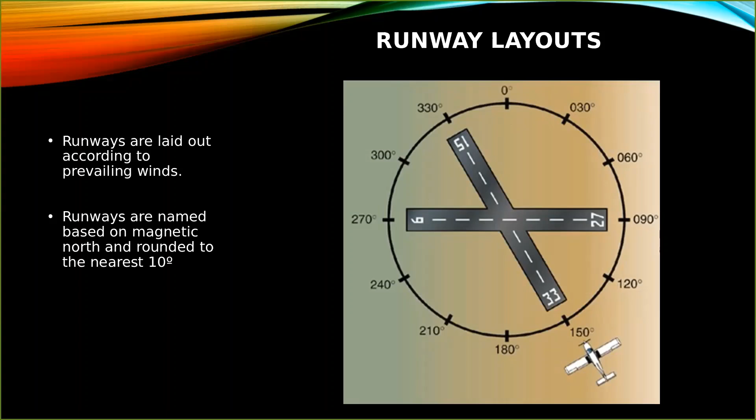Cool. So then there's different types of runways. Essentially, the more complex the operations at an airport, the more complex the runway will be. So a visual runway, pretty much what we have here, has numbers and a center line, because they don't have crazy operations. They don't have airliners flying in on their instruments. They know that when people fly, it's mostly going to be visually flying. So it's not that crazy of markings.

Then as the demand increases a little bit, so non-precision instrument, they'll add some more markings. So this beginning part is called a threshold. It just signals in the air that this is where the beginning of the runway is and you can land. And then it has these two markings here, which are technically called your aiming points, also referred to commonly as 1,000-footers, because they are 1,000 feet from where the runway begins. And that's where you typically want to try to touch wheels down, within this spot.

And then you have your most precise runways. This is what you can find at huge airports, DIA, because they have a lot of planes flying in based off of their instruments, which then lead them to all these markings. So really they're adding these right here. These are touchdown zone markings, just letting planes know where they want to try to touch down. These touchdown zone markings are spaced every 500 feet.

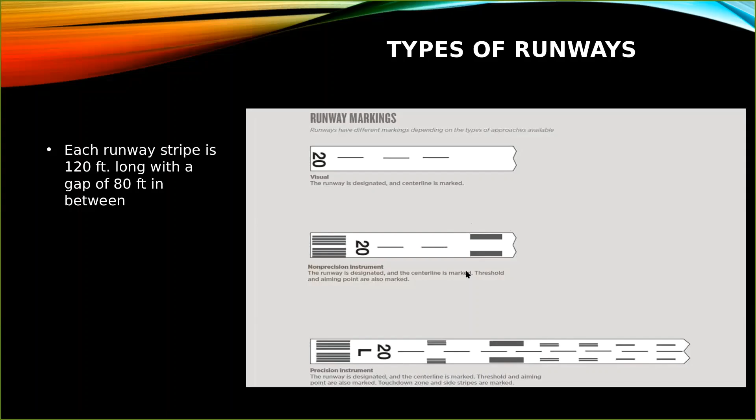But yeah, captain's bars, they may call them. So we then have relocated runway thresholds. Like I said, a threshold indicates the beginning of a runway. It lets you know where the runway begins and where you can land. At some airports, there's now buildings popping up on the approach to the runway. It's now unsafe to approach the runway on their current glide slopes, so they may have to relocate the beginning of the runway. It's usually indicated by these yellow chevron marks.

And a good rule of thumb is when you see yellow lines, it's taxiway, white lines, runway. So you can use the spot leading up to it for taxiing, but you cannot take off or land, obviously, in the spot designated for taxiing. It does shorten the runway length available, but the chart supplement we referred to before will give you how much runway is available.

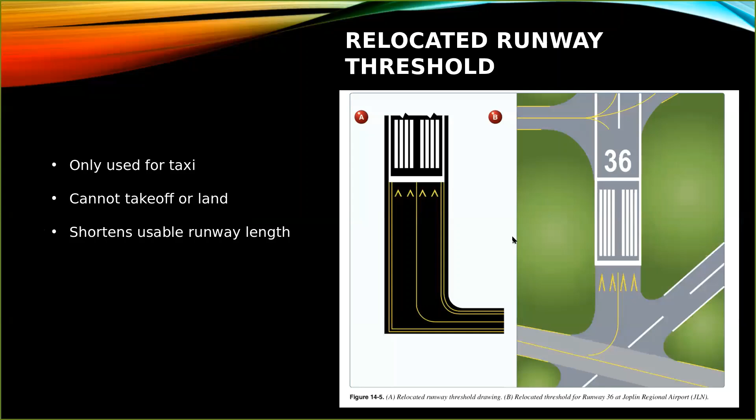And then these are blast pads, indicated by, again, chevrons, but they won't allow taxiing on this. It's just designated areas to protect property, cars, whatever, from jet blast so that the jet blast doesn't just destroy whatever it's going on to. Can't use it really for anything except for emergencies if you absolutely have to. Otherwise, can't be on it.

Sometimes runways will be closed, and when they do that, they'll put a giant X on the runway. If it's permanent, they'll paint it on the runway every 1,000 feet. If it's not permanent, then they usually have vertical signs with a big X letting you know that the runway is closed. Now, this also can be applied to taxiways. They can close taxiways as well. But usually that'll be announced over a NOTAM or air traffic control telling you not to taxi on it. But you can sometimes find these on taxiways.

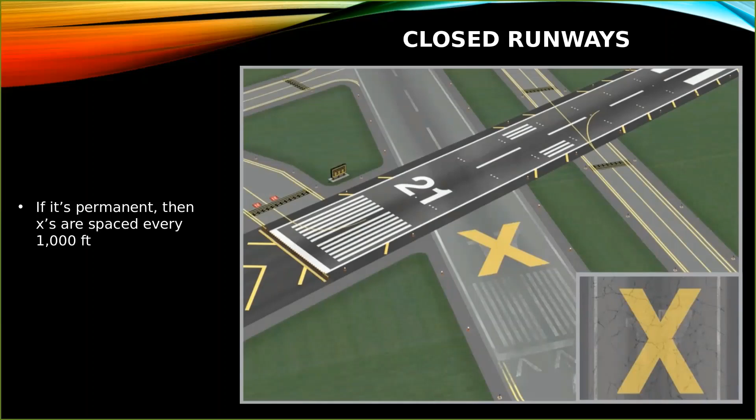So one of the most important signs and markings that you will have in aviation is a hold short marking. That's what this is. It's the double solid line, double broken line. That means it's the area where you have to stop before approaching a runway. That marking, you can never cross that without getting a clearance from air traffic control to cross that hold short marking. Associated with it is this red 2-1.

So again, this sign indicates you're approaching runway 21. And like I said, the red signs are kind of like a stop sign. You need to stop. It's letting you know also visually, stop here. The way that I like to think about hold short signs is that the solid double line will always be on the side of the taxiway approaching a runway. So a solid line means I cannot cross that.

I have to stop. Now you may think, well, what about an uncontrolled airport? You always have to stop. The only time you can cross that is once you visually verify no one is coming in to land on final. No one is currently on the runway. And because it's an uncontrolled airport, if we have winds where people can't decide on which runway, you might actually have a plane coming in to land on the opposite end of the runway. So you always confirm that those three are clear of aircraft before you cross that.

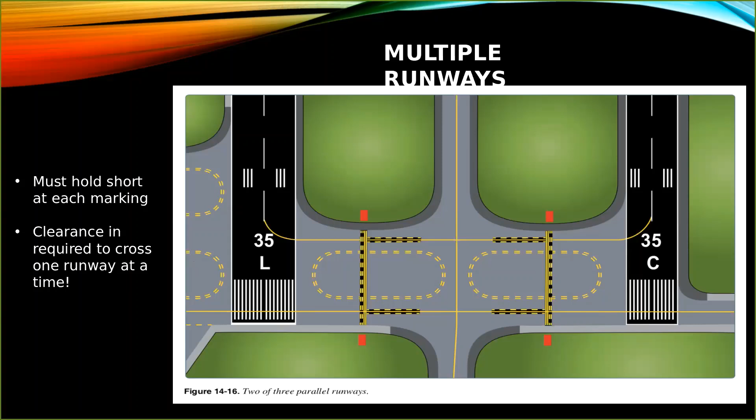And if you're ever unsure, always stop because you're not breaking any rule. All they'll say is you're good to go. You don't want it to be the opposite. If you cross that and now create a collision hazard for an aircraft, you're possibly looking at your license getting taken away. So these are the most important signs in an airport environment.

So now this is the runway coming up to a hold short sign. We addressed the solid side as like a barrier you can't cross, but the broken side you can freely cross because you are coming off the runway trying to get clear of the runway, so you can freely cross the hold short on the broken side. So that's how I kind of remember it.

The solid barrier means I must stop. I can't pass without clearance. The broken side is I can freely cross. You clear your plane all the way across it, and then you come to a complete stop, perform an after landing checklist, or if you're at a controlled tower, you have to call ground, get a taxi clearance. Does that make sense? Okay. Cool.

What this does is it creates a runway safety area. So aircraft taking off, aircraft coming in to land. Let's say there's crazy crosswinds where they can't maintain control. They get blown off the runway. What it's really doing is creating this area where they can safely do whatever they need to without running into us. Because if we just go right up to it and they get slightly blown off, they could be creating a collision hazard with us.

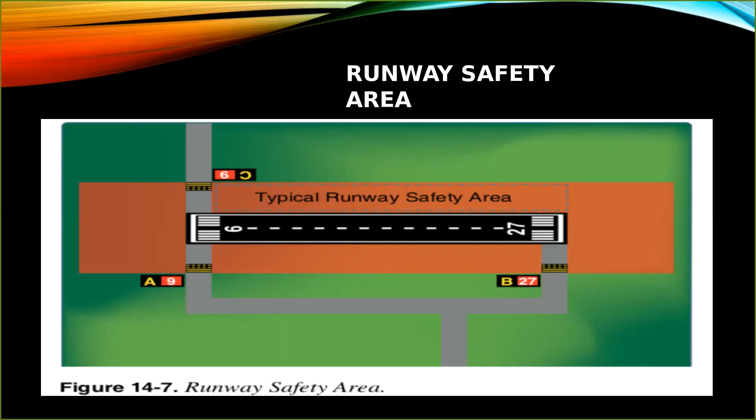What you'll also see is the ILS critical area hold sign. This is the ladder-looking one, so it looks like a ladder. You'd most likely, it'd be rare that you as a private pilot without an instrument rating would encounter these, because once ILS is in effect, that means the minimums are pretty much below VFR flying that a private pilot could do, and they're having planes coming in based off their instruments. However, they have this hold short so that planes stop here and don't interfere with signals that are guiding planes in both vertically and laterally.

So it's rare that you'd probably encounter this as a VFR pilot, but you never know. But if air traffic control tells you to hold short of the ILS critical hold area, you hold where this ladder sign is, with the ILS marking next to it. So a visual representation of what it's doing: this is a normal hold short area, and this is the ILS hold area. It's creating that protection so that the signal getting sent out to aircraft instruments is not getting blocked, because if our plane was here, our tail may interfere with a plane being guided down to the runway vertically. That's why they have those in effect.

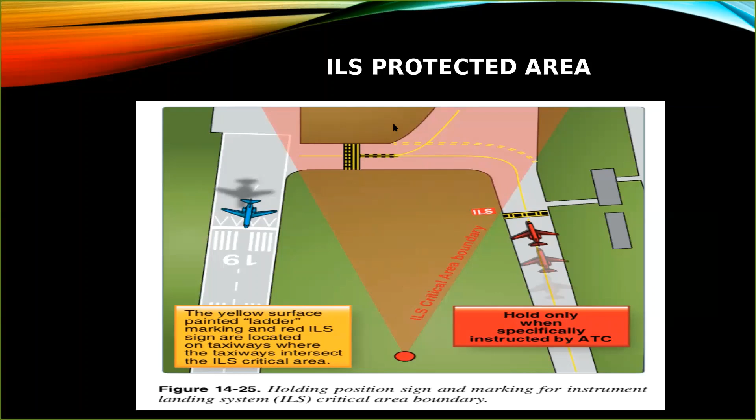Mental aid that I use to remember this is just like driving a car. When we drive a car, we drive on black asphalt, usually a two-lane road, with white or yellow stripes in the middle. Whatever helps you keep that in mind—black background with yellow lettering will always tell you where you are located.

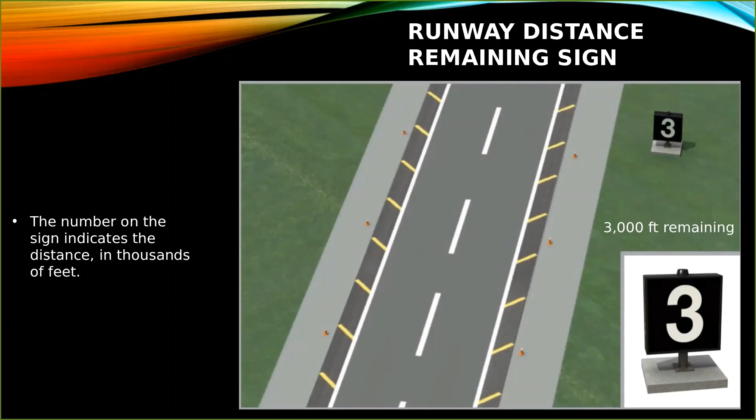Land and hold short operations—it's always referred to as LAHSO. So someone may give you a LAHSO clearance; that's what they're referring to. What it is, they're giving one aircraft clearance to land, and if they say land and hold short, they're saying land and hold short of a specific spot on the runway, usually that hold short marking that we saw.

You always have the option to deny one. So if they say, can you accept a land hold short on runway whatever, you'd say unable. It gives them a little bit more work, but if you're a more experienced pilot and familiar with an airport, and you know you can absolutely stop before then, sure, go ahead and do it. If you fly into an unfamiliar airport and don't have that many hours, I would deny it. Because what happens if this aircraft has an emergency on the runway and has to do a go around? You guys are now converging and potentially creating a very dangerous situation. That's why they don't allow student pilots to do it—they want private pilot license or above.

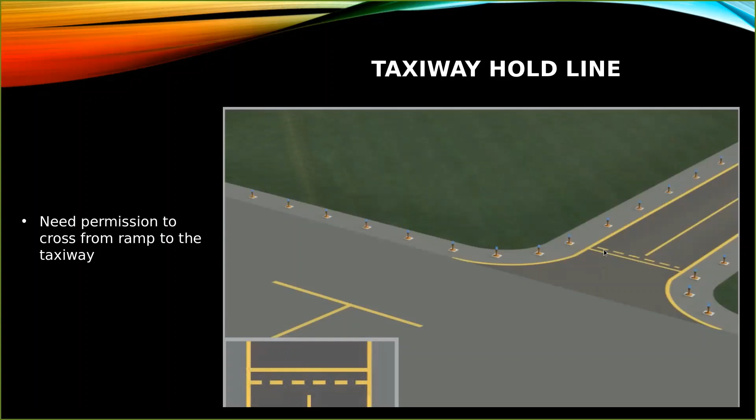Just like a runway hold short line, we have taxiway hold short lines. These are different because it's one solid bar, one broken bar. Same rules apply: you have to stop and get clearance from ground air traffic control before going onto the taxiway, or if you're at an uncontrolled airport, confirm that you're not going to be a taxi hazard to any other aircraft. If you're on the side coming from the ramp, it'll usually be from the ramp leading onto the taxiway. However, if you're getting off the taxiway, you have that broken line you can freely cross.

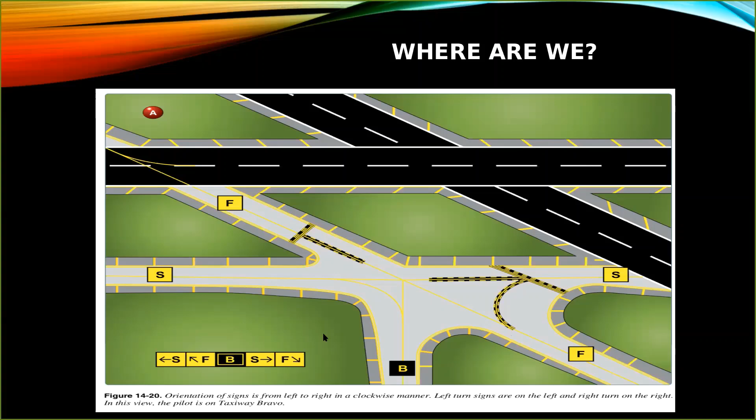This is an airport diagram. Airport diagrams give you a layout of the airport, the taxiways, and the runways. On it they list what are called airport hotspots. Airport hotspots will always have these circles marked with HS, whatever number. These are a location on the airport movement area which has a history or potential risk of collision or runway incursion, or where heightened attention by pilots is necessary. Most likely a collision has happened here, or the designers of the airport have specifically laid out that this is a spot that's crazy with traffic.

This diagram on the right is Centennial Airport in Denver, where I trained. It's hard to see, but this spot here—this taxiway leads to it, this taxiway leads to it, this ramp leads to it, this taxiway, this runway taxiway pull-off, this runway taxiway pull-off—there's a lot of potential for aircraft to collide right there. So that's just letting you know the spots on the airport. Have your eyes peeled, take it slower than you normally would, so you're not going to run into other aircraft.

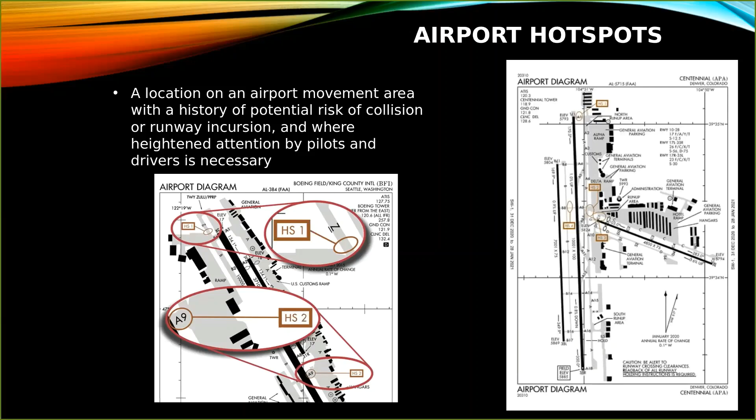Runway incursion avoidance is kind of putting it all together. The FAA is honing down on this. To quote the saying: any occurrence in the airport runway environment involving an aircraft, vehicle, person, or object on the ground that creates a collision hazard or results in a loss of required separation with an aircraft taking off, intending to take off, landing, or intending to land. It seems rare, but you have 3 of these that happen each day at controlled, towered airports with someone directing. Even then, 3 a day doesn't seem like much, but it equates to 1,100 accidents per year. The FAA is saying this is way too much.

So what can we do to make sure we don't create a collision or an incursion in the runway environment? Absolutely, knowing those hold short lines, and pulling up and briefing those hotspots on the airport. When you get a taxi clearance, they're going to say taxi via Bravo, Charlie, Delta. Go over that before you even start moving the aircraft and say, yep, where Bravo meets Charlie, that's a hotspot.

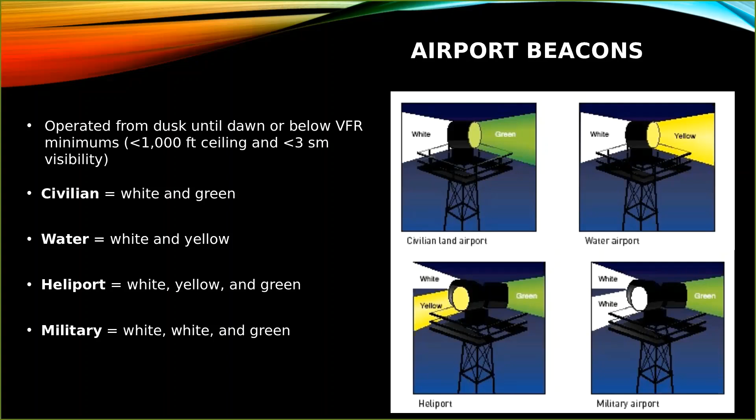Taxi edge lights will always be blue. If an airport doesn't have physical lights installed, some airports have blue reflectors lining the taxiways. Your more advanced airports will have taxi centerline lights, which are green. We don't have them here at Meadow Lake. We do have the blue edge lights, but Colorado Springs, I believe, has the green taxi lights. If you ever fly over there at night, you can kind of see that. It's pretty cool.

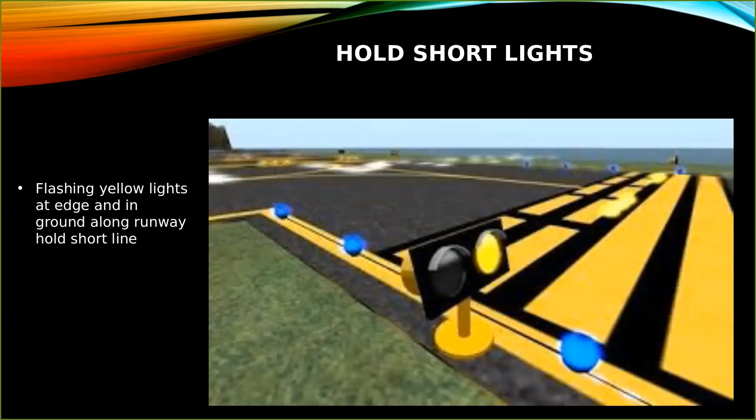From the taxiway, that leads us to hold short. Hold short lights, if equipped, have flashing yellow lights on the side of the hold short marking, along with some lights within the marking on the ground. We don't have this here at Meadow Lake. If you pay attention at DIA, next time you're holding short of a runway at night, you'll see these flashing. That's a big way to get your attention to stop, don't cross this line.

Now runway lights. Runway edge lights will always be white, along with runway center lights - they're white, hard to miss. When you're approaching a runway, the beginning of the runway is green. And then the opposite end, the far end, will be red. They do have dividers, so one side is green, and the side approaching or facing the runway coming the other way is red. So when you're approaching the runway, you'll see green, but as you land on the far side of the runway, you'll see the red lights identifying the end of the runway.

The beginning of the runway is sometimes also equipped with runway end identifier lights that just flash white. It's another way to get your attention to the beginning of the runway. At Meadow Lake, we have the green lights, but we don't have the flashing white lights on the side of the runway.

So they stay the same, except one side will be red if you look at it 180 degrees - correct, depending on the angle. If you're on one side, you'll see red; flip to the other side, you'll see green. But good question.

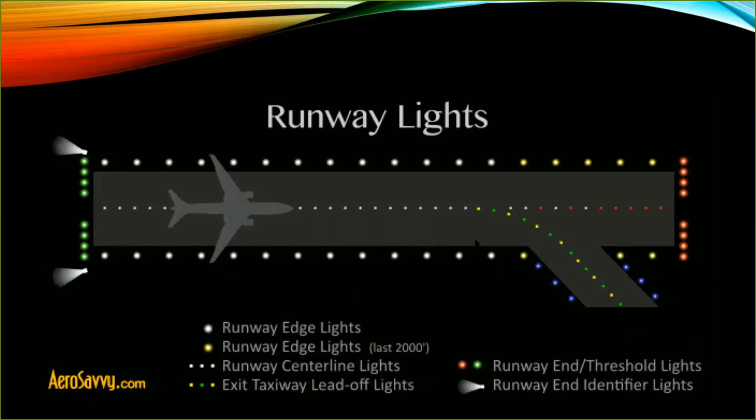Pilot controlled lighting: some uncontrolled airports have the option for pilots to control the lighting at night. This is an effort to preserve energy, but also allows pilots to use the lights when they need them. What you do is plug in the CTAF, Common Traffic Advisory Frequency - this is what you'd talk to other aircraft on. Once you're plugged into that, it's called keying the mic. Keying the mic is literally just pressing the button so you can talk.

To activate the lights, you key the mic: press it 7 times within 5 seconds for high intensity lights, 5 times within 5 seconds for medium intensity lights, and 3 times within 5 seconds for low intensity lights.

They operate on a 15-minute timer, so be aware of that. At night, I had a video of this but it didn't transfer. I told my student this while we were doing touch and goes at night, staying in the pattern. So I always say, within 2 touch and goes, take off, land, click it again to make sure the timer doesn't go off.

Well, he didn't do that. So I got my phone out because I was anticipating it. And as he was on short final, the lights disappeared. He freaked out. So know that it operates on a 15-minute timer.

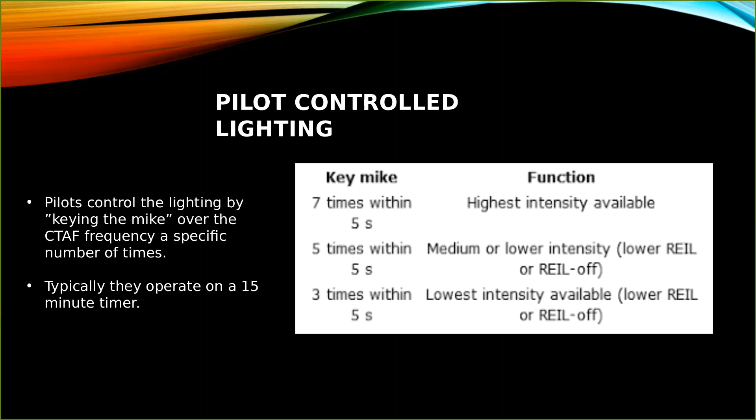We have approach light systems. This is primarily used to provide a transition from instrument flight to visual flight. So again, this just helps you identify the runway, and it's mainly for instrument flying, but you guys will probably see this throughout your flying.

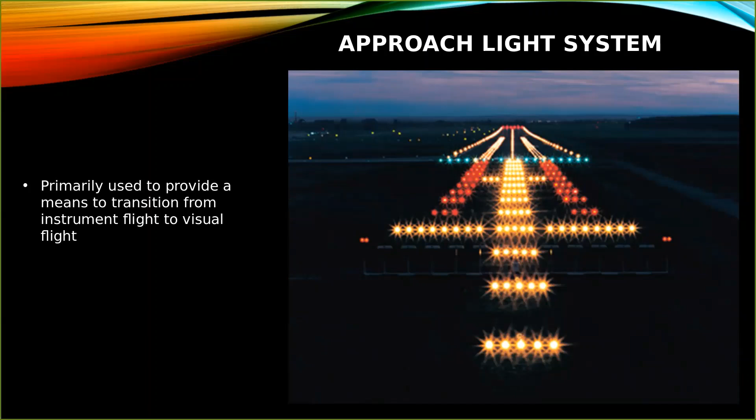If you fly at night and go to Colorado Springs, you're going to see it. If you fly at night and go to Centennial, really any airport around the Denver area, you're going to see these approach lighting systems. They're just a better way to help pilots popping out of the clouds at low altitudes find the runway. But really, it's just used for instrument flying, and it's nice for us to even identify runways.

We then have these lights on the side of the runway as we're approaching. This is specifically a visual approach slope indicator, or VASI. This lets you know if you're on a good path on final as you start your descent to land on the runway in that safe area.

Most of the time, that runway marking I identified as the 1,000-footers, or the aiming point, is what these lights are going to bring you down to, roughly that aiming point or the 1,000-footers for runways that have them. Otherwise, these are established to give you obstacle clearance while safely coming to the runway.

In this, there's 2 bars over 2 bars, which is what a typical VASI looks like. When you have 2 red over 2 red, you're too low - that means you need to add power and try to get higher. When you have 2 red over 2 white, that means you're on a perfect glide slope down to the runway, which gives you obstacle clearance.

So the danger of being below it is now you're not guaranteed obstacle clearance. It's important to correct, especially at night when you can't see most things, to stay on a proper glide slope. When you have 2 white over 2 white, you're too high, so you would reduce your power and descend a little bit so that you get red over white. Red over white is your ideal situation.

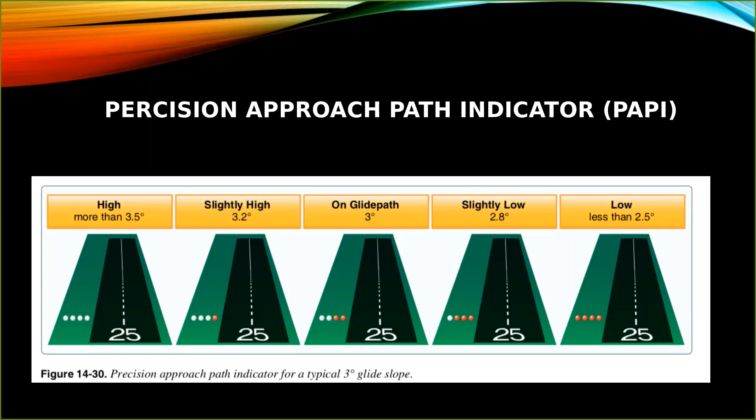The next ones are in your textbook, we go over them, but I've literally never encountered these in my life. The tricolor light system is just one light that shines out these colors. And similar to your question on runway identifier lights, these actually have dividers within the light based on the degree. So it shines out these colors all in one unit, but it has dividers within it that give you certain angles, letting you know if you're too high or too low. I don't know, does that make sense?

Anyway, so tricolor: if you're above glide path, you get an amber on a tricolor. Green is good, if you have green you're on glide path. Amber means you're slightly low. My caveat with that is there's an amber for high and an amber for low, so that can get confusing. You'll quickly find out though, if you're low it'll turn red. Like I said, I've never encountered these and I've flown to a lot of airports, but it's important to note.

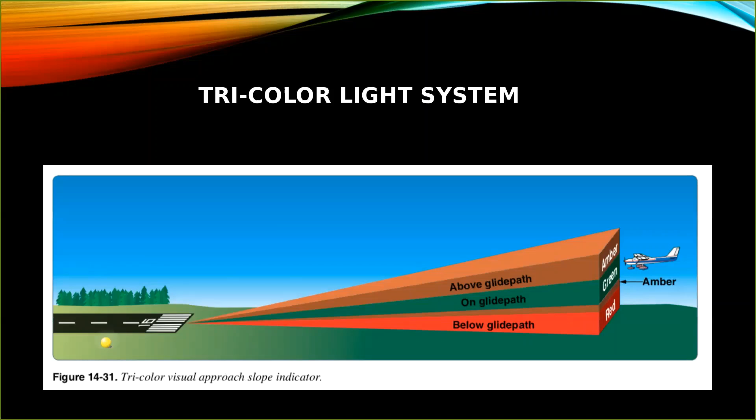Pulsating light system, same thing, single unit, just pulsates lights. So if you're high, it'll be a pulsating white. If you're on glide path, steady white. If you're slightly below, a steady red. If you're way below, pulsating red. Really just to get your attention.

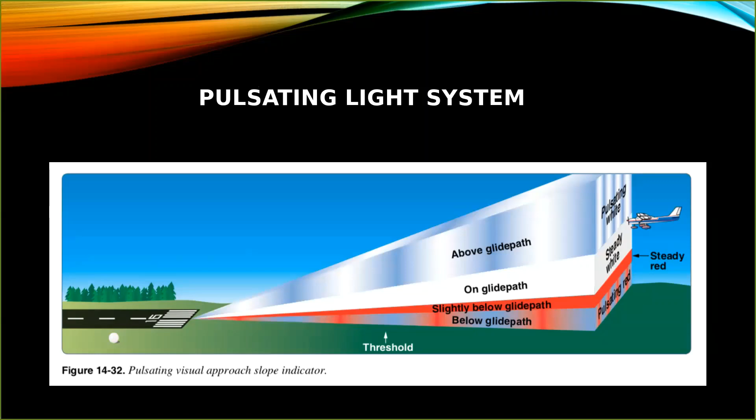Obstruction lights at night, I'm sure you guys have seen these if you've traveled to a city. Usually obstruction lights are always red, placed on the corners of buildings, placed on cranes. We have out to the east a windmill farm, and they have red lights in the center of each windmill that all blink in unison. I don't know if you've ever seen that driving around here, but it's pretty cool to see at night. So usually if you see red lights while flying at night, avoid it. There can be times when they also use flashing white lights to get your attention, so they'll have red and flashing white, usually if it's a really tall structure, saying hey, this is really tall. They place these lights kind of on the corner of each building.

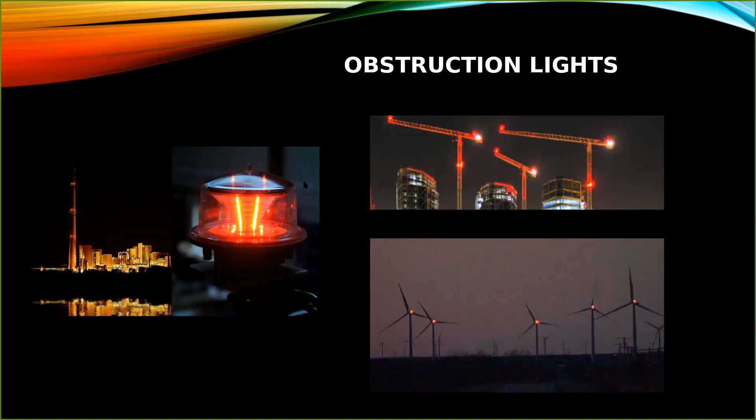The tetrahedron kind of points with the wind, but the way that I remember it is it almost points the direction you should land, because we always want to land and take off into the wind. So you kind of think of it pointing in the direction where you should land. The same is true with this wind tee. This is kind of a representation of our plane; it faces where the wind is blowing from, and it's a representation of how you should land. So our plane should be roughly facing this way to land into the wind.

Honestly, I've never seen a tetrahedron, and I've never seen a wind tee.

I've always seen wind socks. The thing to be aware of sometimes with these tetrahedrons, they're big and heavy. And sometimes if you have drastic wind, airport managers or air traffic control authorities will actually go and tie these down. So they'll clip it into place, lock it into place. So they caution you that sometimes it's not even a reliable reading. So that is something to be aware of.

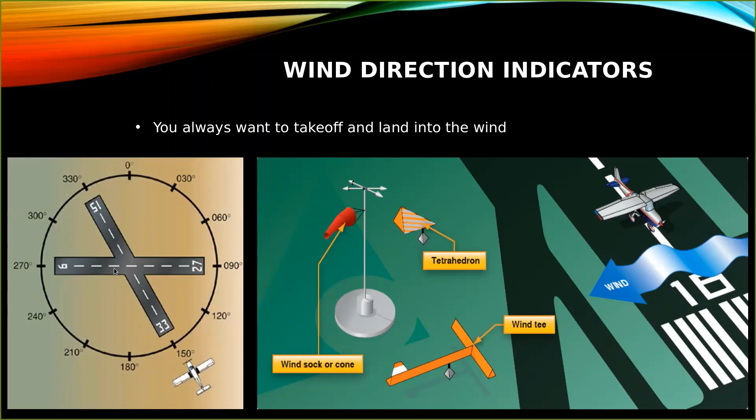Okay. Taxiing in the wind. When you're taxiing in the wind, if the winds are strong enough, they can legitimately blow the plane over or off the taxiway. So to fight that, we hold our elevator and ailerons in a certain position, and that's on your yoke. So yoke or steering wheel, if you guys haven't been in the plane yet. Your steering wheel is called a yoke in the plane.

When you have a wind that's coming from a quartering head, so from in front of you to the left, it says to use up aileron on left-hand wing and neutral elevator. Well, how easy is that to remember? I never remember that, even as an instructor. But that means, as a quartering headwind, we do neutral elevator. So with the yoke, you're not pushing forward or pulling back. That physically moves our elevator on our tail up or down. You just keep it in the center. You're not pushing or pulling.

And what up aileron on the left-hand wing means, if you have a left quartering headwind, is just turning into the wind. So if you have a quartering headwind from your left, you turn the yoke left. That'll deflect your aileron up. With your aileron deflected up, the wind blowing over the top of the wing hits that aileron, pushing that wing down, as opposed to if our aileron was down, the wind under our wing would hit that down deflected aileron, force that wing upward, and potentially flip your wing over, thus flipping us over.

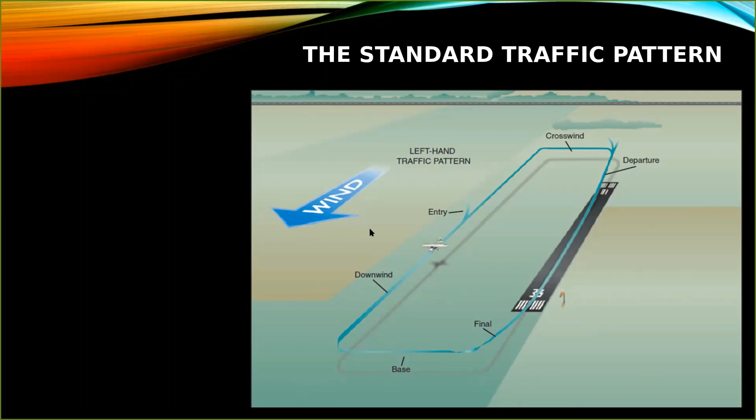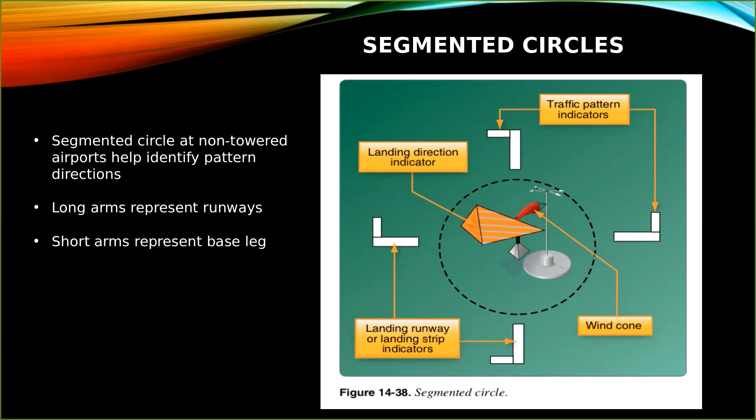And then, yeah, the wind indicator in the middle obviously is in the middle to help you decide which runway is the obvious runway to land on. Parallel runways, we have one of these because we have a dirt strip where we do glider operations.

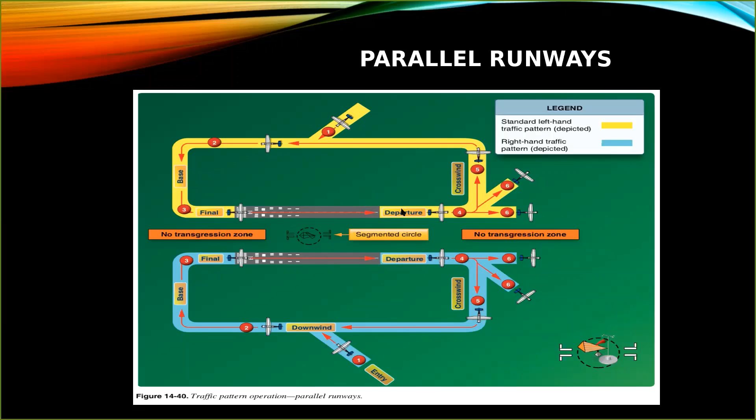It only gets trickier. Mesa Gateway in Arizona has this. So now you're talking about, what if you have 3 runways, left, center, right? Now it gets super tricky, but those will always have a control tower to walk you through it. But that's just something to be aware of. And honestly, a lot of airports, Colorado Springs has one, Air Force Academy has one, Pueblo has one, we have one, Centennial has one. So you are going to encounter it. They are very common.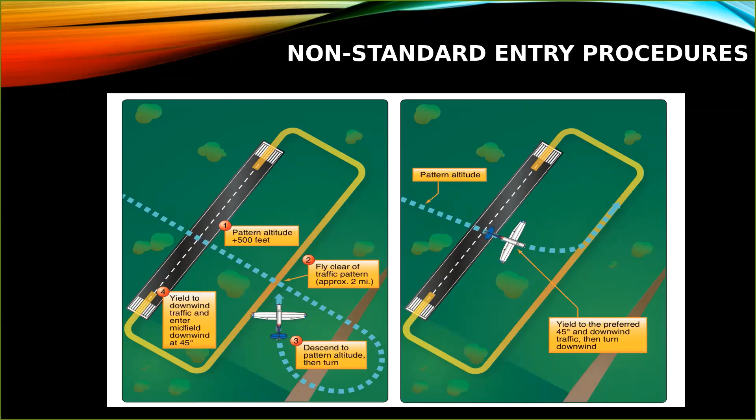All right, radio communications. A great pilot has great radio discipline. What I like to say is, say what you need to say, no less, no more. You have people of all ranges making all different radio calls. Some people take forever. You'll hear them say, "Good day, Meadow Lake traffic. This is blah, blah, blah. And I'm about, I'd say 13 miles to the north. I think I'm gonna," and it's just like, this is taking way too long.

You also have people who say, "Taking off runway 15." Great, then what?

Have radio discipline. You need to say what you need to say, no less, no more. Otherwise, you're taking up unnecessary time, or you're not communicating effectively for other pilots to know where you are or what you're doing. So really just getting into it, we always use the phonetic alphabet and numbers.

The phonetic alphabet is pretty straightforward. If you don't know it and intend to fly, memorize it. You're going to be using it like crazy. That's all everyone ever references.

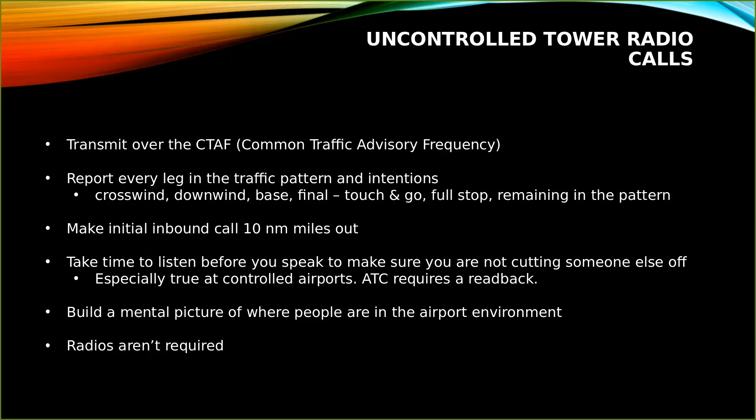Air traffic control services. You have center.

Center is really just flight following on a cross-country flight. They're just watching you fly your cross-country trip, and they'll make you aware of any traffic along your route. You also have approach and departure.

Sometimes, like in Colorado Springs, this is literally the same person. It's just whatever you're doing, you address them differently. If you're coming in to land at Colorado Springs, you'd say Colorado Springs approach. If you're taking off and departing from Colorado Springs, you'd contact departure.

Tower is responsible for landing and taking off aircraft. So you contact tower when you're holding short of a runway and ready to take off.

Or coming in, approach will say, Skyhawk 62740, go ahead and contact Springs Tower, 119.9. Then after you land or before you taxi, you contact ground.

Ground is responsible for taxiing. Ground will taxi you around. That's who you contact, before you taxi and after you land.

Clearance is really mostly for IFR flying. They give you your IFR flight route, but for some airports, they require that you just call them up and they'll say you're cleared to fly, essentially. It's kind of rare that you guys would be contacting clearance.

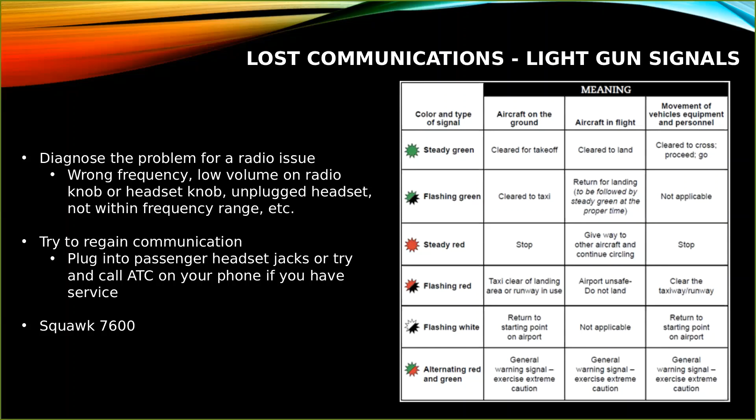So the transponder transmits our position, altitude, and call sign to ATC. They have radar that sends an interrogating signal, our transponder responds to that signal, sends it back to the radar, and it displays on air traffic control's screen. That's how they see aircraft. Because we can plug in codes, they can specifically identify certain aircraft.

Let's say we're trying to approach Colorado Springs approach, but there are 10 aircraft there. They'll say squawk 4633. By us putting in 4633, they can now identify out of those 10 planes which one we specifically are. Then they'll usually say, Skyhawk 670, radar contact. When they say squawk, that just means to input or program a code in your transponder. They will always say squawk—that's really what it means.

You have different squawk codes. 7700 is your emergency code. Let's say you have engine failure, something's not right with your flight, someone's having a heart attack, or you feel like you're going to pass out—squawk 7700. That way air traffic knows you're in an emergency, and you now have priority; they need to get you on the ground.

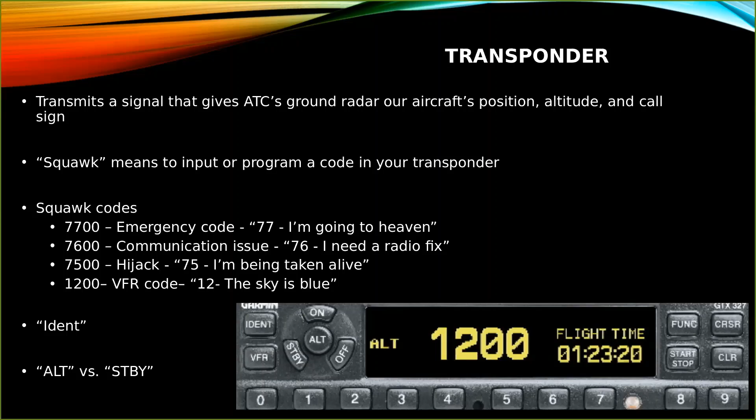As of 2020, this is I think the last slide before break. As of 2020 we need ADS-B out. ADS-B stands for Automatic Dependent Surveillance Broadcast. It essentially does the exact same thing as your transponder, except now it's sending out a GPS signal.

Traditional radar, like I said, has a ground radar sending out a signal; it interrogates our transponder, which responds and sends it back. What ADS-B does is transmit our position, speed, and altitude once per second automatically, sending that to GPS. GPS sends that to a ground station, and the ground station sends that to air traffic control—all happening within milliseconds.

So it gives them better accuracy of aircraft and allows them to cover a wider range they weren't able to cover with a transponder, because since it's based on satellites and GPS, it doesn't need the line of sight that a transponder requires. It allows them to see pretty much everywhere. So at times when they couldn't provide services because an aircraft was out of range of a radar—going over the mountains, so to say—they now can, because of GPS.

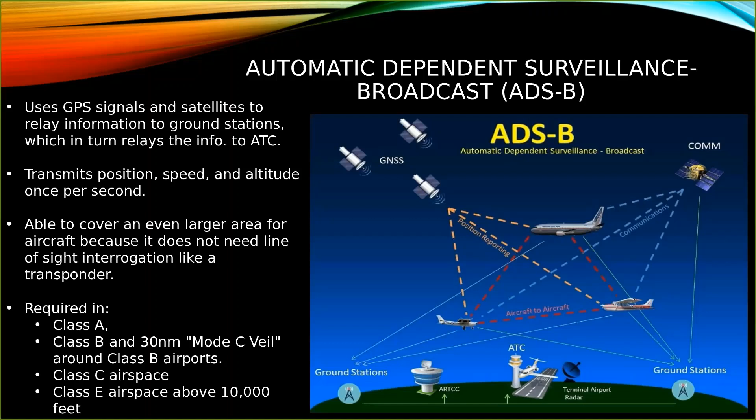You can think of it as a transponder. Everywhere a transponder is required, like you guys learned, ADS-B is now required too. It's required in Class Alpha, Class Bravo, the Mode C veil, Class Charlie, and Class Echo above 10,000 feet. It does get specific over the Gulf of Mexico, but we most likely will never be flying there.

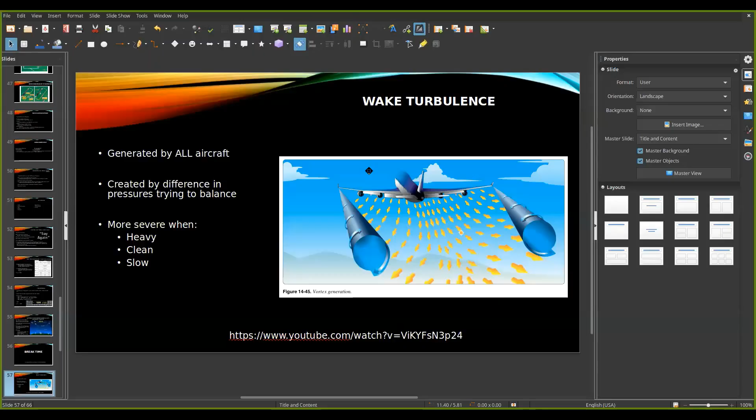We'll pause that. Oh yeah, sweet, thanks.

As you saw, all aircraft generate it. It's just those wingtip vortices are stronger when aircraft are heavier, clean, and slow. What does clean mean? It means they've raised their landing gear and now their belly is clean.

When are these cases most likely to happen? Exactly what we just saw. Heavier planes are at their slowest during takeoff and landing. So you're most likely going to encounter this during takeoff and landing, but it happens no matter when we're flying. When we're producing lift, we're always going to, so you can also encounter these in flight.

This is created by pressure differences trying to balance. You have a high pressure below the wing and a low pressure above the wing. As that flows over the wingtip, those pressures are trying to balance with each other, creating essentially that tornado type thing. Sorry, this is the result of transferring to this computer.

So, wake turbulence avoidance. The best thing you can do: air traffic control is going to try to give you time so you can avoid wake turbulence. So when you're trying to take off and a huge airliner just took off in front of you, wait at least 2 minutes before you take off, because those take time to dissipate.

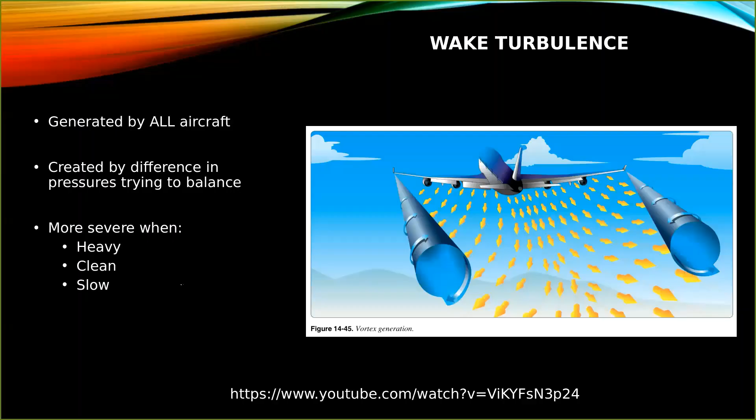If you're approaching a plane in level flight, if you're the same level as him, you know his wake turbulence is at least going to sink. So if you're crossing his flight path, you want to climb because you know his wake turbulence is going down. If you're flying behind him, fly at a higher altitude than him. So really, most of the time, it's being above the wake turbulence.

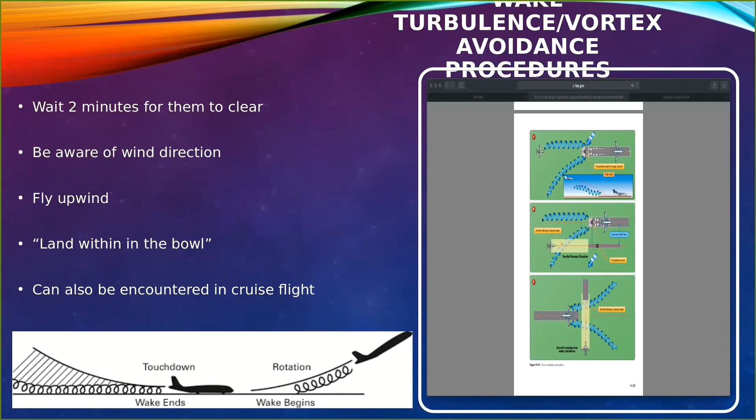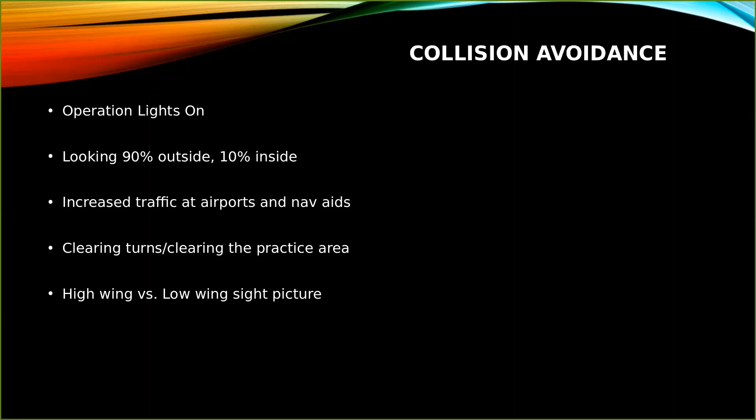So for clearing turns, you can do either 2 90-degree turns in both directions. So you turn 90 degrees to the left, scan the area. After it's scanned, turn 90 degrees back to the right, scan the area. Or you can just do a complete 180-degree turn to clear the area. And then we'll get into high versus low wing sight picture.

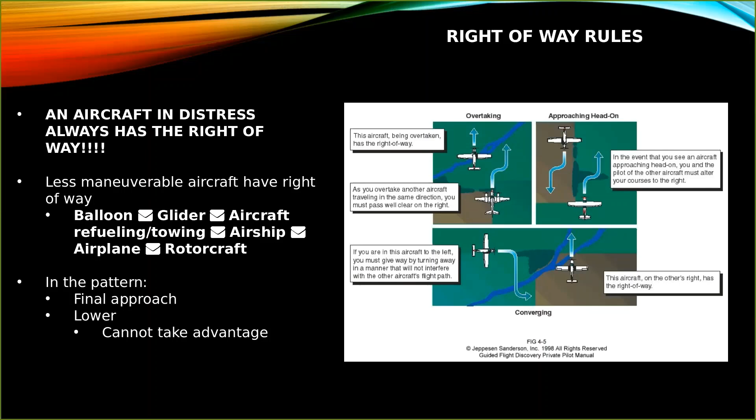Now the FAA caught on to some people taking advantage of this, saying, oh, they would just dive down and say, well, I'm at 9,500, you're at 9,600, I have right of way. So they say, don't take advantage of this rule. On a normal approach, whoever's at the lower altitude, they have the right of way.

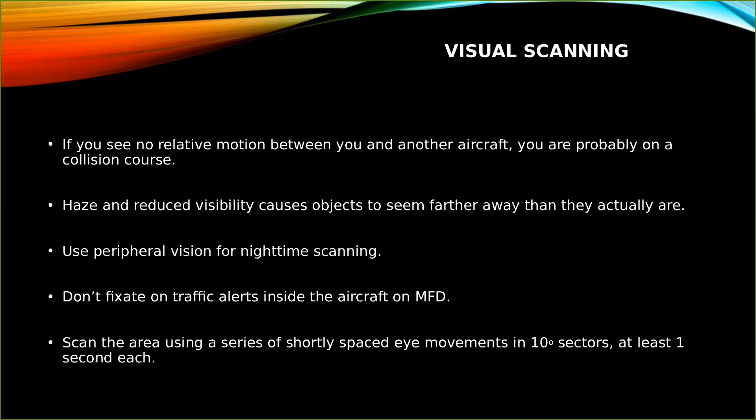And then you want to scan the entire area using short, spaced eye movements of roughly 10-degree sectors, at least 1 second in each. There's 2 ways to do this. You can start literally on one side, work your way to the other. So work 10 degrees, scan up and down. 1 second, work 10 degrees, scan up and down. Wait, 1 second, scan up and down.

We emphasize you always want a clear windscreen when you're gonna take off, because smeared bugs on your windscreen are roughly the same size as traffic at a distance. So if you have a dirty windshield, your eyes are gonna be continually focusing on those dead bugs and you can't actually accurately see traffic. So one, clean your windshield every time before your flight. Winter time is kind of an exception. There's not many bugs, but during the summertime, probably between every flight.

Another trick: if you're looking off in the distance, your eyes naturally want to fixate roughly a couple feet in front of you. That does not help us in visually scanning. A technique when visually scanning is starting with the ground, working your way to the sky. That way you're training your eyes to actually look at a spot far off in the distance, and then your eyes will be adjusted and you move up to the sky so you're looking off in the distance. Go over here, pick a spot, scan the ground, pick a spot in the distance, then move up to the sky.

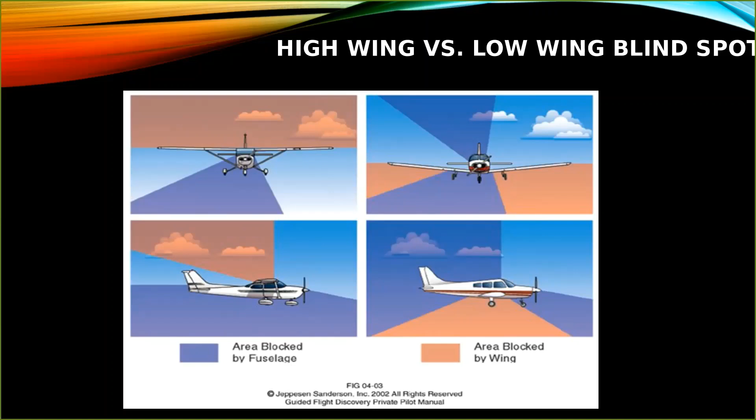What's the danger in this? High wing aircraft. Let's say we're flying in our Cessnas. We can't see above us. There's a plane coming in to land who's a low wing. And he can't see below him. We can't see each other, and that creates a huge collision hazard. So one, be familiar with high wing versus low wing aircraft. Two, if you see a low wing aircraft, know if I get below him, he cannot see me. And you risk this. It's not just theory, it does happen. And I'm going to show you one more YouTube link where they almost had this happen.

I think stop sharing, right? Let's try that. I can go full screen.

Sorry, if I stop casting, it doesn't say any of this, huh? I always forget to use a mouse.